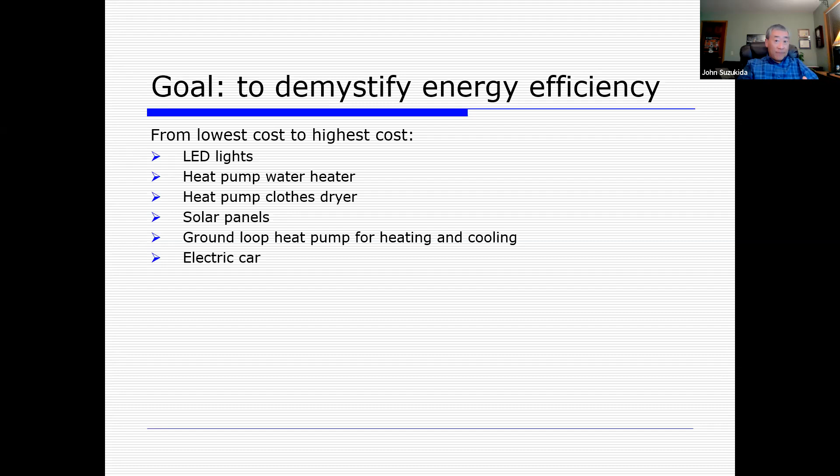So basically what I'm going to do is to try to demystify terms in energy efficiency and electrification, things like that. And to do that, I'm going to go through 6 different categories of things from lowest cost to highest cost, starting with LED lights and moving on to talk about heat pump hot water heaters and heat pump clothes dryers, solar panels, a ground loop heat pump for both heating and cooling. Some people may call them geothermal heat pumps. And lastly, electric cars and some of the practical aspects of all of those. You'll see this pop up at least a half a dozen more times because I'll keep coming back to it to say, here's where we're at in the agenda.

I do like to start just about any talk that I give with what this is and what it isn't. So what it is: I just have a passion for using energy most efficiently. That's just the way I'm made up. It's a personal view of mine on real world practical things, user experience perspectives. It's really to share what I call learn by doing to help you, hopefully. What it isn't: it's not an advertisement for any brand. I'm not sponsored by somebody. It's also not to convince anyone of anything.

It's not full of a lot of technical jargon. It's also not detailed financial paybacks because they vary greatly. There's just a lot of variables. I've got some rough rules of thumb in here for you, but it's not meant to be detailed. Energy is obviously a very complex topic. So this is really just all about actions on one home. And hopefully by sharing it, it'll help that demystification process.

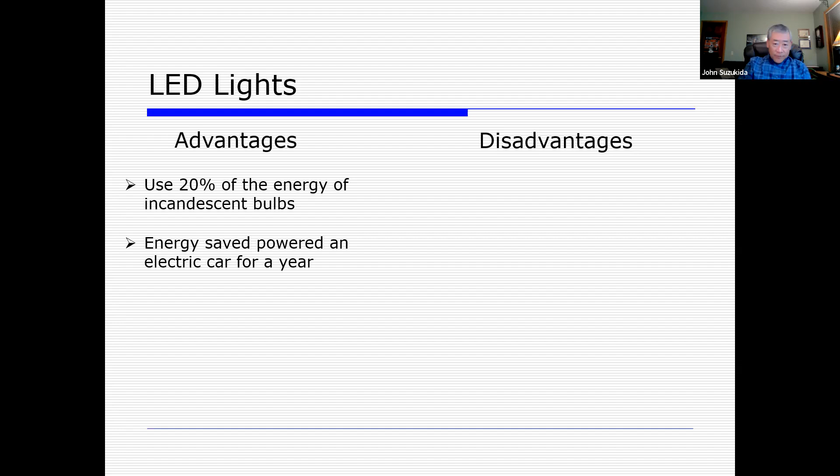So LED lights, and these are just my perspectives, right? It uses a fifth, or only 20% of the energy of incandescent bulbs. And you realize that right away. If you've got a hot bulb and you're trying to take it out, you can do it with an LED light. You can't do it with incandescent. You'll burn yourself. It's creating so much heat. That's the inefficiency. And as I mentioned, the energy saved by just converting my entire house to LED lights can power an electric car for about a year.

Another advantage, it's cost competitive now. When compact fluorescent lights first came out a long time ago, Xcel Energy came out with a deal, and I bought these really ugly looking tall compact fluorescent lights and put a few of those in. They're expensive. They didn't last long. They're hard to recycle. Now, LED lights are very cost competitive.

A disadvantage is disposal. Although Tim Pratt, of our very own Shoreview Environmental Quality Committee, said that throughout the Metro County, they are accepted at hazardous waste sites. And the only reason for being hazardous is it's a microelectronic. An LED is similar to why you don't just throw out your computer or your TV. So those are some of the advantages and disadvantages.

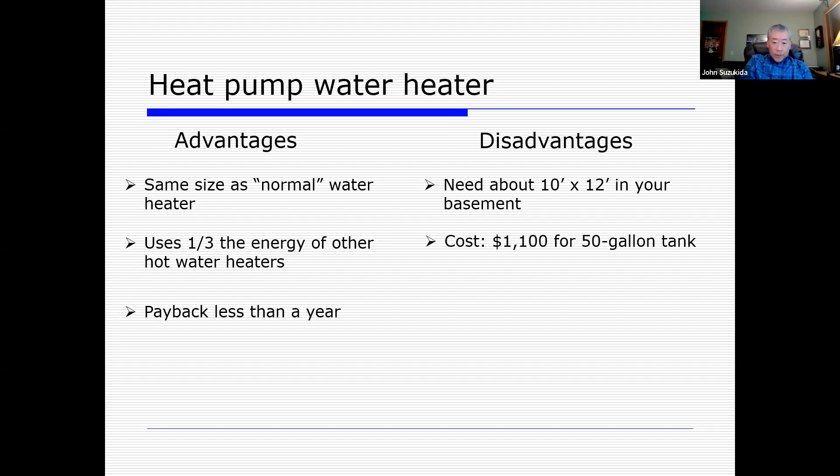Cost, no question, it's more expensive than a non-heat pump hot water heater. I just checked a big box site where I bought my heat pump hot water heater, and an equivalent just electric, as opposed to heat pump, hot water heater cost $860 for the equivalent level. In other words, 50 gallon, that quality level. And it cost $1,100 for the 50 gallon tank. Some of you may be familiar with the 11% sale. That kind of helped on that one. It dropped it even more, from 1,100 less 11%.

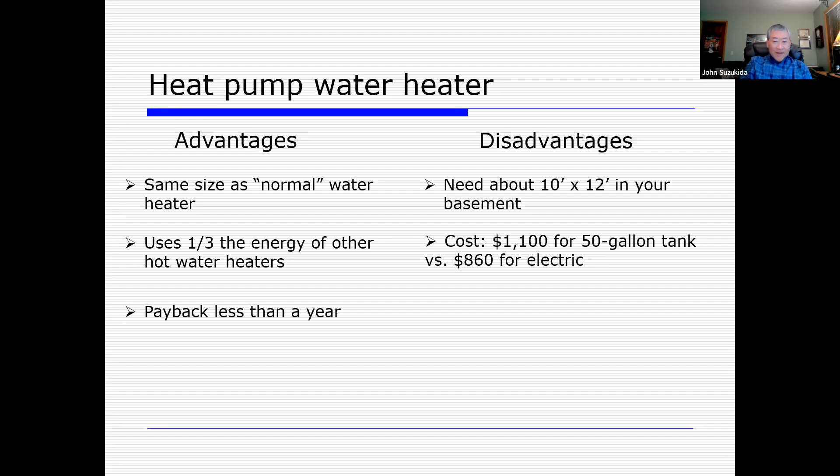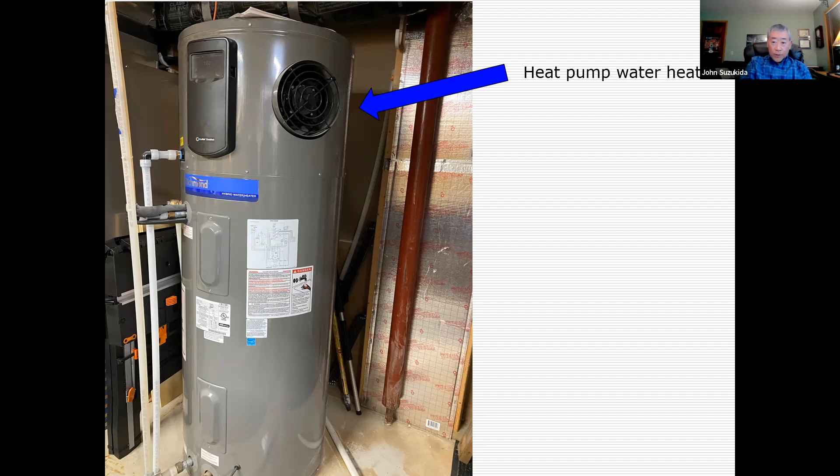Okay, I am going to move on then to the third topic, a heat pump clothes dryer. In the case of heat pump hot water heaters, it's certainly become much more common. You see them in the ads that come out for big box stores and that sort of thing. Heat pump clothes dryers have not achieved that level of awareness. Throughout Europe and Japan, they're very common. They're just everywhere. But they only started to really come into the US about 5 or 6 years ago, and so they don't have quite the awareness that heat pump hot water heaters have.

Okay, so let's talk about heat pump clothes dryers, advantages and disadvantages. Basically, it dehumidifies clothes and it's gentler than high heat. With gas dryers and electric dryers, we kind of bake our clothes, make it really hot. It's not always that easy on the fabric. But basically, the whole purpose is to get the moisture out. And so a heat pump clothes dryer dehumidifies the clothes, gentler on them than just baking them. It dries in the normal amount of time if needed, and I'll come back to that as I talk through the disadvantages.

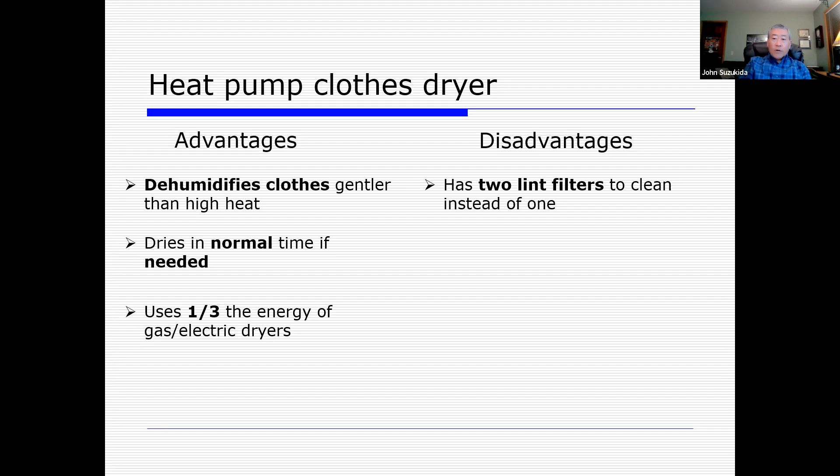Now, disadvantages. There are 2 lint filters to clean instead of 1. And it can take 2 to 3 times longer to dry. No question about it. If you just let it run in its most efficient mode, it'll take 2 to 3 times as long to dry. But if you need it faster, and this is my term, not the term on the dial, you put it in like a turbo mode or a quick mode, and basically it becomes an electric dryer. Just like any other electric dryer on the market, it'll heat them up and get it done if you just need something quickly.

I don't know if most people do this, but when I'm doing the laundry, I'll run off and do some other stuff and go, oh yeah, I need to switch it, and I'll put it over there. And then I'm not always listening for exactly when it's done. I'll go back and, oh yeah, I had something in the dryer. So typically time isn't of the essence, but if it is, you can do it in a heartbeat just by pressing a button.

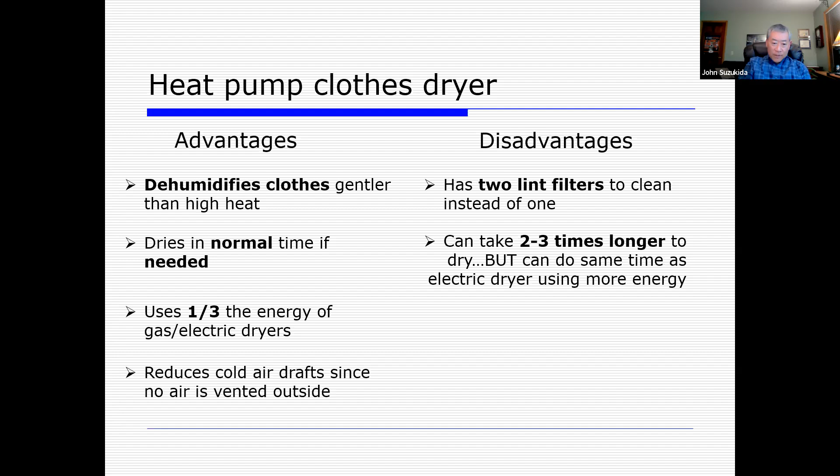Now, one of the subtleties of this is it reduces the cold air drafts because no air is vented outside. I'll touch on that in just a moment. I want to give you first a feel for cost. And again, I'm not pushing anything. I don't get paid by Warners-Stellian to say this, but the reason I put their name in there is because it's available.

Whirlpool, name we all know. Warners-Stellian, name we all know. This is where I didn't want to get too definite about cost because I'm not much of an expert in levels of quality of washing machines and dryers. And so, in my opinion, they're not inexpensive versions of washers and dryers.

They're higher end. And so I thought, probably the best way to help give you that perspective is, I took out the purchase order and said, oh, okay, so the washing machine was $810 and the heat pump dryer was $1,260. Certainly both are more expensive than the lowest cost ones you can get.

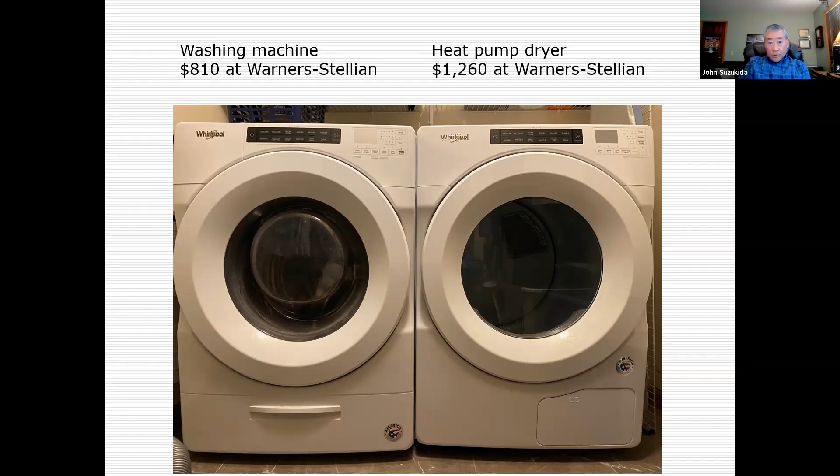I don't know enough about washers and dryers to compare them against a standard washer and dryer at that quality level. But for anyone that's bought higher level washing machines, I don't think this would be too much of a surprise to be in that range, but I just thought I'd put the numbers out there so that you have a feel for it. And to show you, washing machine on the left, dryer on the right, looks very conventional.

Now, this is the point that I wanted to come and show you a picture and actually a little video here. This is something that we've all seen, right? On our houses, when you're running a dryer, especially in the wintertime, there's just a lot of discharge. You can see it, the white smoke coming out of there. Basically, that's the humid and warm air that's coming out of your dryer.

It has to be exhausted because typically people are using gas, burning gas in order to create the heat. And so the exhaust has to go out, but typically people, even with electric dryers, send it all out. So for all of that air that's coming out, it's warm and it's high humidity, right? Every bit of the air that comes out has to come in the house.

And so what happens is through all the leaks in your house and the windows and whatever else, it's drawing in cold air, the same amount that it's exhausting. So you're drawing in cold air that makes it kind of drafty in rooms. It cools it down. Definitely makes your furnace run more frequently because now you've got to heat that air up.

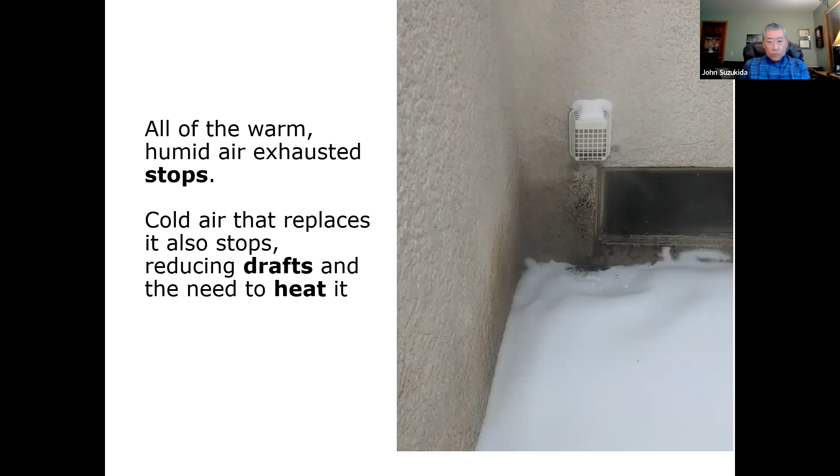So I've always found it kind of ironic in a climate like ours that what we're trying to do is create warm air that's humid. Some people buy humidifiers to get the humidity. And here we're rejecting warm and humid air in the middle of the winter, and then drawing it in through cracks in the rest of the house and heating it. So just an interesting little phenomenon.

Okay, one of the other dimensions or disadvantages that I talked about was the fact that you have to clean 2 lint filters. So I decided the best thing to do is I'll cut a video, and here it is.

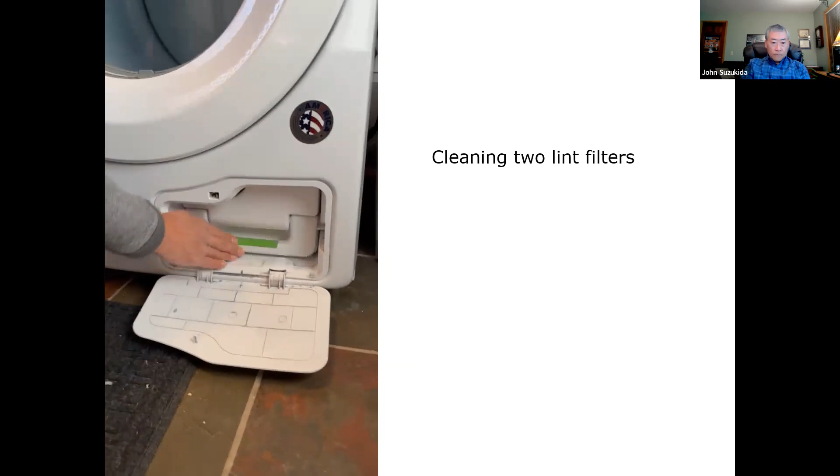So my anecdotal comment would be that my wife and I are completely on the same page on this one. Cleaning out the second lint filter, I can't think of another word other than it's just a little bit annoying. Oh yeah, I need to clean that too. But as you can see, it's not huge to do. It's just one more thing, right?

So that's the whole purpose of this, is that I wouldn't want anybody to be surprised. I didn't know there's a second lint filter. That's what we do to clean it. All right, so I'm going to leave the topic of heat pump clothes dryers. Hopefully a little bit of awareness there will help. And I'm going to move on to talk about solar panels.

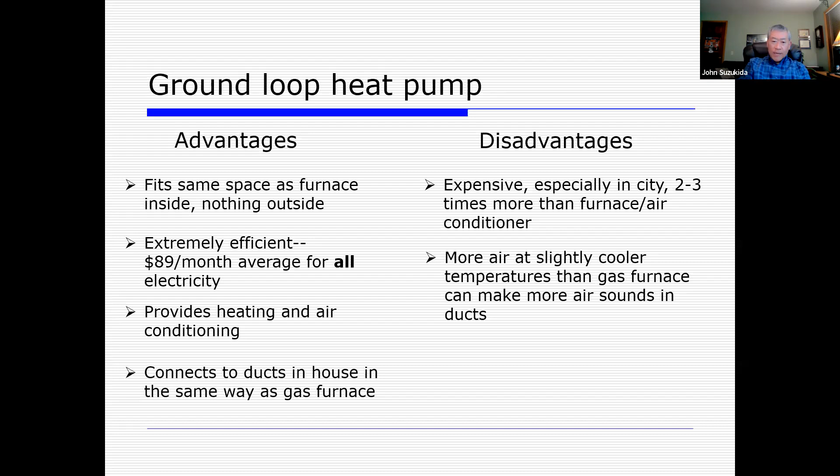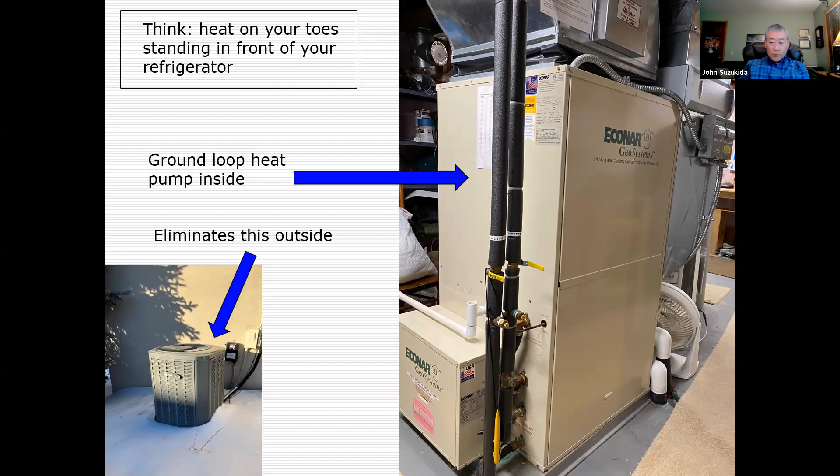It's just extremely efficient. That's why it doesn't cost much to run your refrigerator. Last time you bought a refrigerator, if you take a look at the little tag inside, it'll tell you about how much it costs to run over a period of a year. I don't know if you're surprised. I know I am. Wow, that's all? Really? It's on all the time, and it just keeps running. So that's basically what a ground loop heat pump is. Hopefully that picture helps give you a feel.

I don't want to put words in my wife's mouth, but when we first got one of these, I said, this is kind of my experiment, so I don't want to force you to deal with things. So you take the gas car, I'll take the electric car and live with it. What has been interesting over time is this is actually kind of the car of choice, because you never have to go to the gas station, it's really easy to drive, very quiet. So we just plug it in and we don't worry about it.

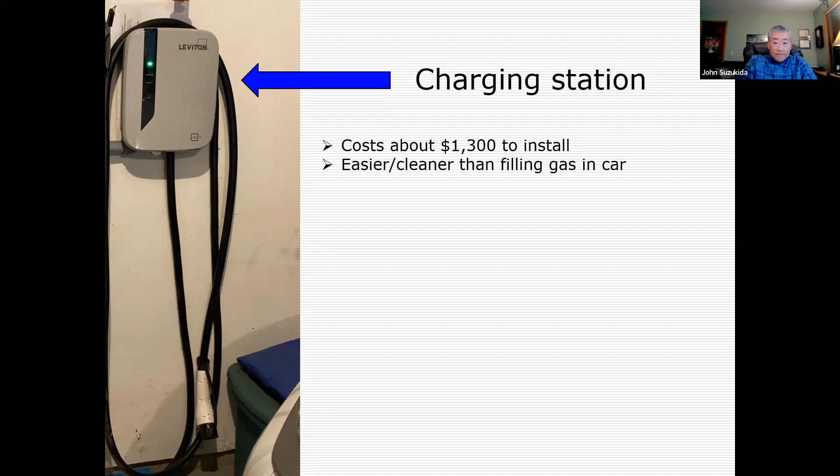I know these things are kind of hard to picture until you do it. So I thought maybe the best thing to do is, instead of just showing you a picture of what it looks like with the plugs, I'm going to show you what plugging it in involves. So I'm going to show you both plugging and unplugging videos.

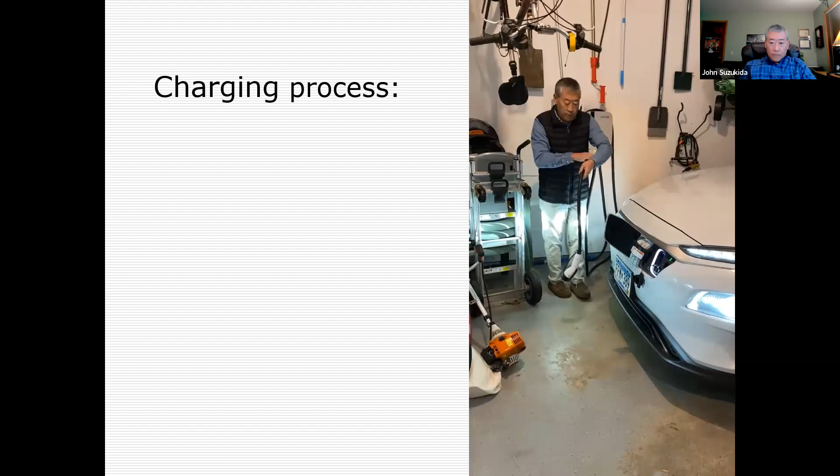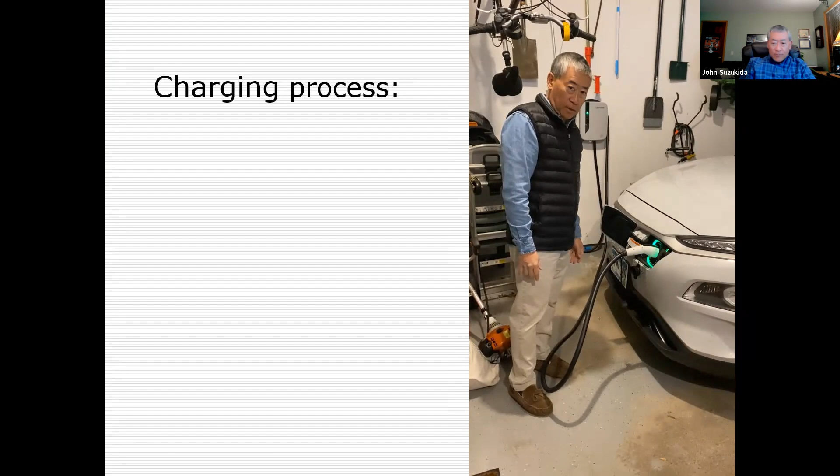So that's all charging is, and certainly a lot quicker to just hook it up, of course, than going to a gas station. It takes longer to charge than the few minutes it takes to fill up a gas tank. But that's basically what it looks like. And so similarly, the unplugging process.

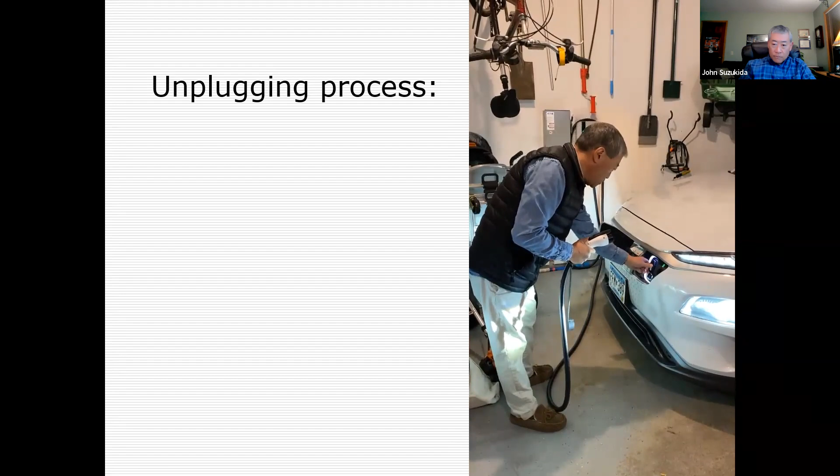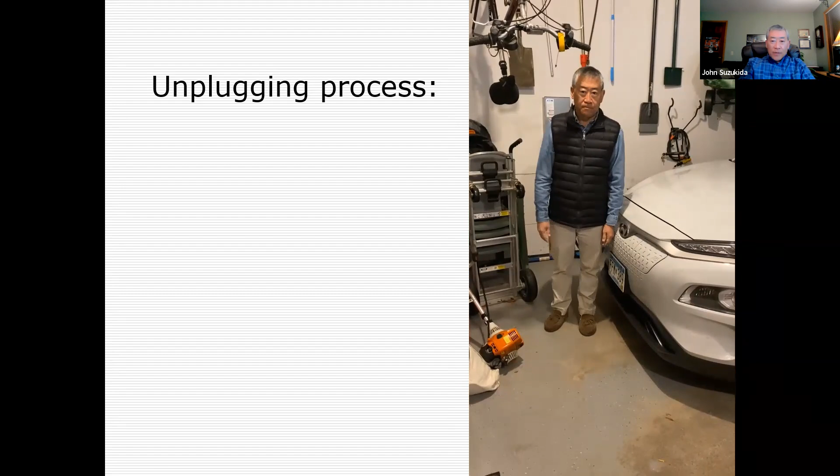So hopefully, while a picture may be worth 1,000 words, a video is worth even more to show you what it takes to deal with electric cars, deal with the heat pump dryer. Everything else is fairly transparent. If you have LED light bulbs, it's really not any different. You turn them on just like any other thing.

Solar panels, you get them installed and you don't have to do anything else, basically. The same thing with a ground loop heat pump. Once you have it installed, you change the air filter. I mean, it's basically the same type of interface. And same thing with a heat pump hot water heater. But a heat pump dryer, again, you do have 2 lint filters instead of 1.

And on an electric car, you definitely need to plug it in. You don't have to do it every day. And we don't. We just kind of monitor it and say, okay, we're not really going anywhere. We don't need to keep charging it every night. We just keep an eye on it and charge it when it looks like it needs it.

And over time, there's something called range anxiety, and that's no matter what, you think, oh, I don't want to be stuck someplace, right? And so it takes a while to get your confidence built up that actually I can go a long ways. Again, 200 to 300 miles is a typical range for most electric cars now coming out. So hopefully those pictures and the videos can help to demystify some of these products that are becoming a little bit more common.

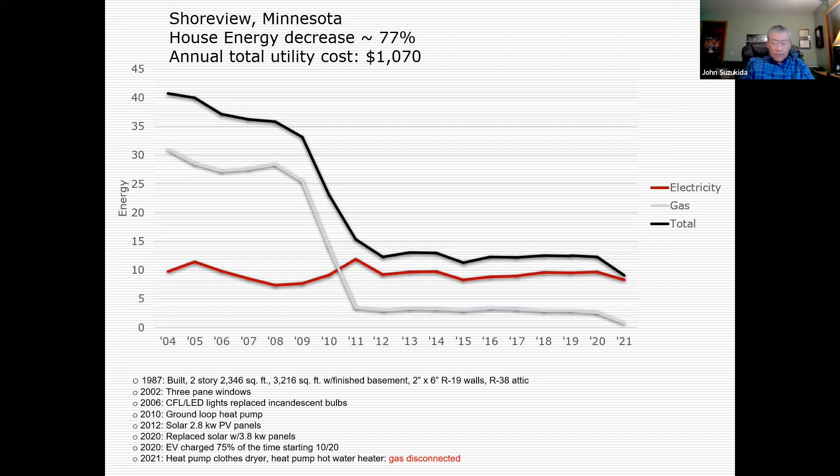And so you've seen each of these pieces along the way. That's kind of the running commentary. So the end result is basically a 77% drop in the energy that this house consumes. And the total annual cost is a little over $1,000 a year at this point. So hopefully that sequence of seeing the curves and then seeing the products and how they work a little bit, and then this narrative, will help you understand that curve.

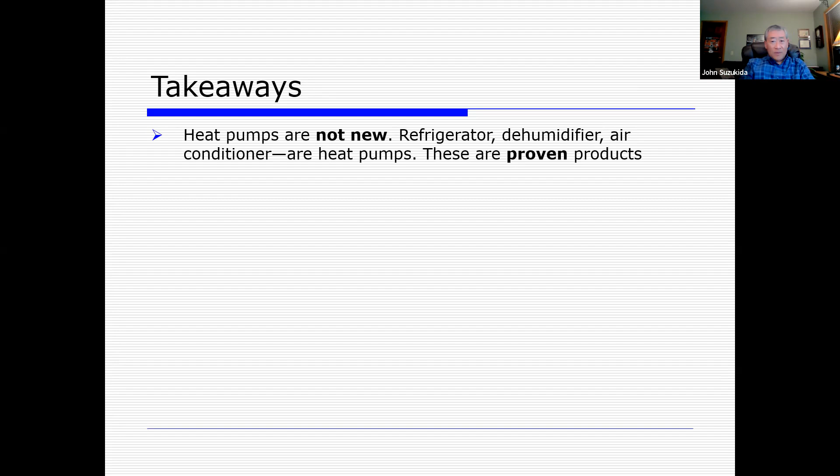Let's go back to the takeaways that I put up there. Heat pumps, you don't hear that word a lot, but basically it's not new. Refrigerators, dehumidifiers, air conditioners, they've been around us for decades and they're very reliable. It's not new technology. They're very proven. And so one thought to take away is, well, I don't know about heat pump, fill in the blank, whatever it may be. I don't know if they're reliable or not. Well, by education, I'm a mechanical engineer, and heat pumps are very reliable. They've been used so long that it's no mystery as to how to make them more reliable.

The other thought to leave with is, well, most of us certainly wait until the hot water heater fails before we replace it, because it's not a lot of fun to replace it otherwise. It's even less fun to replace it when it fails. But basically, if you have an older hot water heater, you might want to consider getting ready for it. So getting electrical set up so you can put higher voltage right there. If you have an electric hot water heater, you've already got it. It's right there. It runs off the same voltage, so you don't have to worry about it.

But if you have a gas hot water heater, which at least half of the homes do, then you'd have to do a little extra planning. It's hard to just call an electrician and have them do this same day. And you might want to consider just replacing it ahead of failure so that you can kind of be ahead of the curve. Just something to consider.

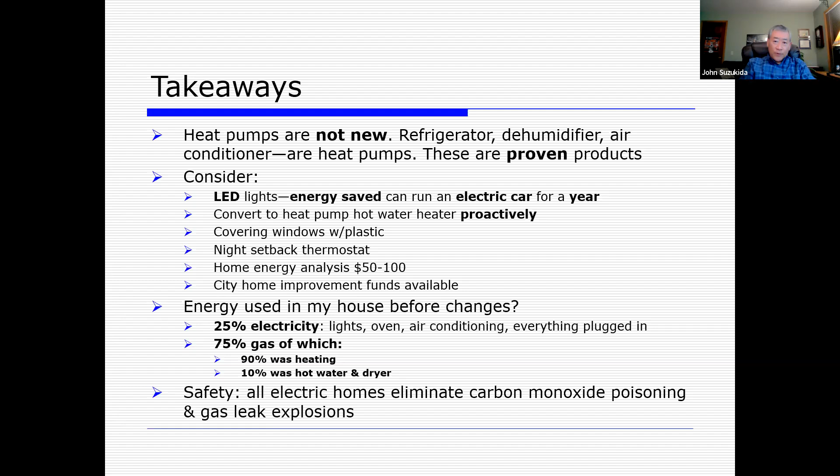And as I mentioned in the beginning, from a safety standpoint, I've kind of moved into this all-electric home over a period of time, but it is a little bit of a relief. I usually had multiple carbon monoxide sensors around with gas furnaces just to make sure. And there's really not a lot that we as consumers or as homeowners can do about gas leak explosions, other than you smell gas and just leave the house, right? Just don't even make a phone call from there. You don't want the electricity from your phone doing anything. Just leave the house and make a call. But those things can happen with gas, and they do every now and then. Fortunately, it's not that often, but those are some takeaways, hopefully, to leave you with.

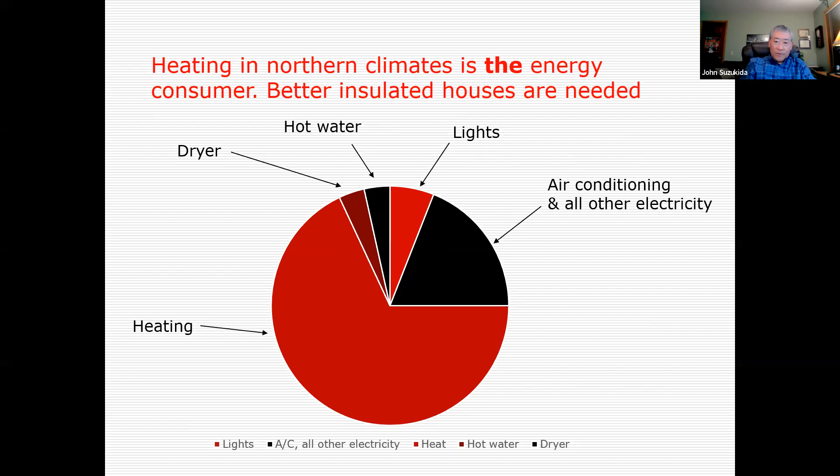And that's the graph that I know had a big impact on me when I realized how much energy goes into heating our homes. And so I learned a lot basically by going through this, and hopefully been able to relate a few of those lessons learned to you as well. So that brings us to a wrap, questions and comments. And I think I'm gonna go into the chat room here.

And okay, so great question, Claire: do you need to remove the snow from panels? So personally, because I'm kind of an energy nerd, it bothered me to no end to have snow pile up. And what I learned is that most of the time in the winter, it's not really covered with snow, but typically what happens is when we have one of those big snowstorms followed by dropping below zero for a period of time, it's covered. And so when that happened, I let it go for about a month, and it made me crazy to think these panels are sitting there and they're not doing anything.

And so the panels are above my garage, and I rigged something to kind of pull the snow off, which isn't a lot of fun because it all comes on you, at least the way I did it. And I had to stop doing that when I started having, what do you call it, rotator cuff issues. I could start to feel that because it's an unusual thing to be pulling snow back and pushing down to keep the squeegee thing that I was using to get the snow off. And so I stopped doing that. But bottom line, I think behind your question is, does that get in the way in the winter? It can.

It just depends. Typically though, they're black and they're facing south toward the sun. And so what I've typically found is that if you have even a part of it open, that being black and absorbing that sun tends to heat up. And once you heat up one part of it, it tends to spread because that heat will help remove the rest of the snow. So there are weeks where really not much energy is being collected, but for the most part, it still collects energy, just not as much in the winter.